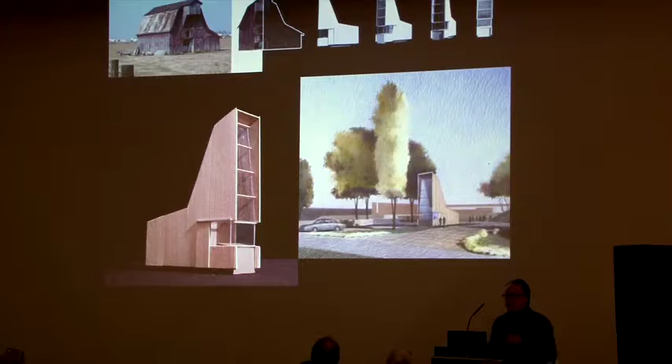Working between the ideal and the improvised in our culture, the condition of resonance is operative here. So we try to find ways to represent what's already there, operations that allow us to take something relatively similar and take a more transgressive attitude to reframe it, to repurpose it in a sense, and to reoccupy it in a new and different way.

When I was growing up, my desire before I became an architect was to be a cartoonist. Except I finally came to the conclusion, after reading an article that said most cartoonists are alcoholics, that I couldn't be a cartoonist. I was like, oh, I don't want to deal with that. So I'll become an architect. Well, anyways, lots of issues there too.

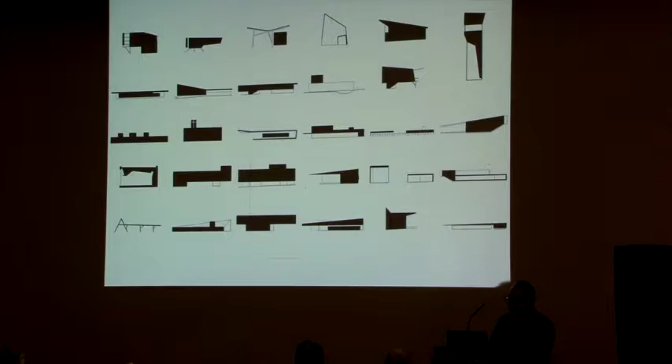But nonetheless, we approach everything, or at least I do, sectionally and as a visage and in profile, trying for the most reductive means of expression. So we've got a whole taxonomy, a whole collection of projects in the office that we've done, with tons more, but always that's how we understand it, as a kind of singularity in its place, first and foremost.

So that's allowed us to engage typologically with different things. The Tower House, for example, everybody gets a project like this, I know. But working from our own place here, from our travels, places like Lucca, a trip to Yemen that I took where people live in towers, but their great social space is the mafraj at the very top.

We're in the city limits of Fayetteville, looking at what nature provides as this thing hits the ground, the textures and patterns. We're intrigued with the striated bark of the white oak, which we milled about 20 miles away. It's a renewable resource that becomes a white oak lattice fin around the 50-foot high stairway, which also marks the mature datum of our oak trees here. They don't get very big where I'm at because our cash crop is rocks.

But once you get up above the canopy, there's a whole other order in the landscape of industrial and agricultural buildings, almost all detailed in white panels and white metal—a whole other order. So we came up with our own white metal panel system that slips over the wood like a husk and creates its own kind of grammar or syntax in its place, all trying to respond and operate in dialogue.

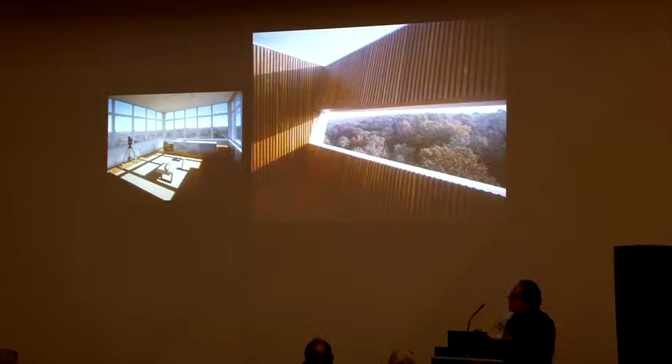And then when you get to the top, it really becomes an active view and how one views the view beyond—a room with a 360-degree view, and then a stair folds out. You go into a room with controlled views to the landscape, but open to the sky, a sky court in which you can take a dinner or sleep out under the stars. It's quite fantastic to engage the world both horizontally and vertically.

Another small project, this was for a girlfriend's, an ex-girlfriend's mother. One thing I tell students: if you ever get dumped and the other person asks you to be friends, at least consider the possibilities. I didn't get to do my mother's house, but I did get to do my ex-girlfriend's mother's house.

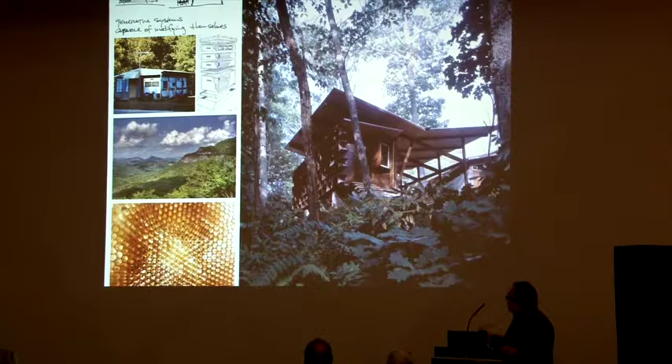Ten years later, she came back as a beekeeper and said, I need a place to take the honey from the honeycomb and turn it into jars of honey to sell along the street. So we made this little structure, 8 foot by 24 foot—it's a honey house—focused on one element, a steel plate and faceted glass wall that's load-bearing. It's really a wall made of voids that acts to organize and display. It also acts as a brise-soleil, creating conditions of opacity, transparency, and translucency in the faceting as it fuses with the landscape around.

A project we had the opportunity to scale up and deal with another typology, that of the recreational building, the golf clubhouse. We were approached by Mr. Tyson of Tyson Foods, who wanted a private clubhouse, but he said, I don't want another Tara or plantation-looking thing or a hunting lodge, which most of these look like.

He said, I want a building of the 21st century that's part of its place, but also respects the traditions and rituals of the game. So we have great stone here, locally quarried, dry stacked, and we wrap the building, this tube, in copper, a 1,000-year material that will turn into a leathery brown over time. It's a repackaging of this traditional program, but adding some surprises as well, like the skylit bath in the wet area.

When this was published on ArchDaily, somebody blogged, hey, Zumthor called and would like his baths back. And I was like, oh God, I must have been channeling that. About 3 hours later, somebody blogged and said, hey, the Romans called Peter, and they would like their baths back. So it's all part of a lineage here.

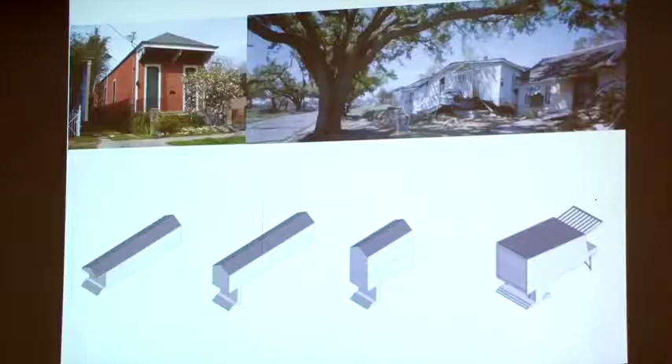But anyways, it was a great opportunity. It wasn't about golf, as I was informed by the owner. It was about people and space. And that's something I think as designers we should be able to engage. The idea of typologies for us, which is architecture in some ways freed from style, is that it is adaptive, dynamic, evolutionary.

This is a post-Katrina house in Biloxi, Mississippi. The group of folks got together - Oprah Winfrey's Angel Network and Autodesk, what a great combination - for 7 model homes to address the new FEMA regulations and to challenge the new urbanist proposition for the Mississippi Gulf Coast. Folks decided not everybody wants to live in grandmother's house with a geranium on the porch, but in fact really deal seriously with having to lift houses now above the storm surge, anywhere from 6 to 12 feet.

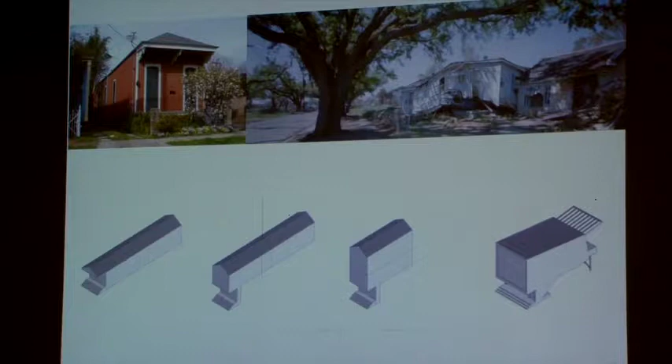So this house starts with the typology of the shotgun, and then we have to lift it. But the thing we're ever mindful of as Southerners is that the porch is that interface between the private world of the house and the public world of the street, and was very important to the social and urban fabric to remain where it typologically always has. But then we stack the program to make it more adaptable to various sites and more concise in its footprint, and that became what we call the porch dog.

And this is it. This is a market rate house, a prototype that can be repeated. It's a $130 a square foot house. Quite excited about that and the possibilities it holds for the future.

Of course, this is what the New Urbanists came up with. It's called the Katrina Cottage. And I can tell you which one won't be there after the next category 4 storm surge. So these things are real, they have consequences. Again, if typologies are only seen as fixed, they just become a discussion about style, and I think this is really what this suffers from.

So I'm going to show you 3 projects that deal primarily with landscapes, and then I want to show you some projects that deal with maybe why you really asked me to be here, but Pamela assured me that if I could talk about landscapes in a heritage sort of way, that might be relevant as well.

This is a project in Indianapolis, the Indianapolis Museum's 100-acre art and nature park that we did with Ed Blake, a great landscape architect, a good friend who's unfortunately passed away, and Mary Miss, environmental artist from New York. Worked for several years on this. It's located in the oxbow of the White River that runs through downtown Indianapolis, and the canal, also a remnant, runs through, so it's effectively a peninsula island.

It used to be a pristine forest, became a pasture, and then became a quarry back in the 50s, dug out to get limestone to build the interstate through Indianapolis. Then it filled up with water and became an amenity in the middle of the town.

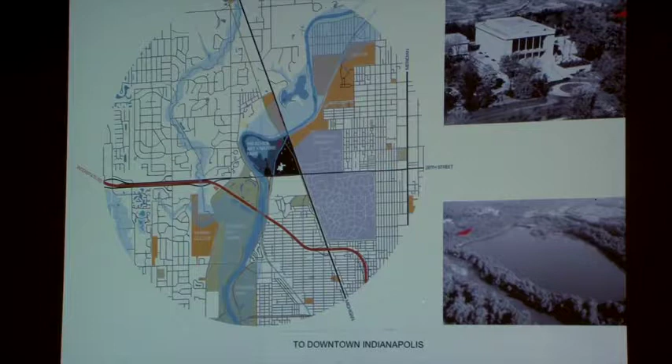We were asked to kind of deal with the volatile condition between land and water. Because of indiscriminate development upriver, they've had 3 100-year floods in the last 8 years. As water rises, the river rises above the lake and breaches into it, scouring the landscape. Effectively 100 acres became a floodway, flood zone, and wetland - there's only 0.67 acres you can actually build on in this property. Site-specific art, that's different, but actual buildings is another matter.

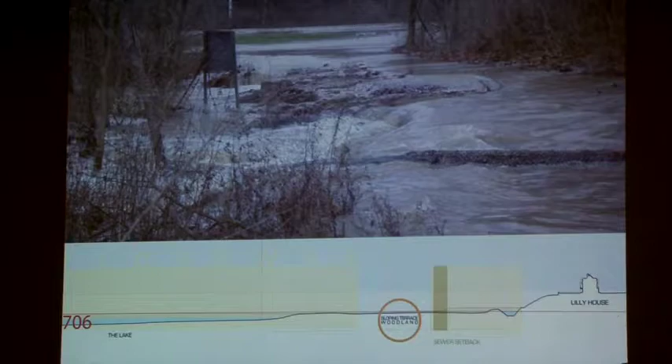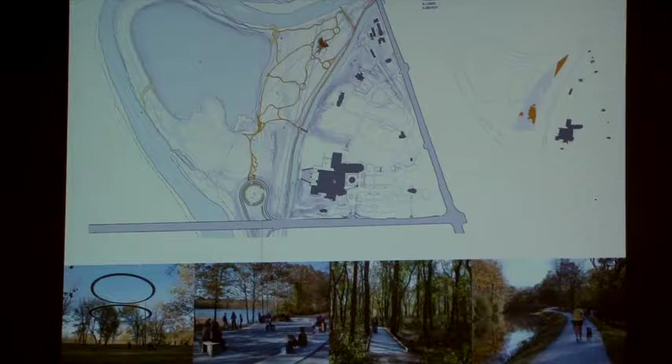So it wasn't too difficult to find our site for this visitor center in the middle of the park. It's part of a series of pathway journeys that Ed designed, not a destination itself, but an extension of these pathways. These are some of the different aspects of the park here.

For us, we came to a wet, fecund site that also fills with water, and we were challenged to elevate our building 5 feet above the forest floor because of the floodplain, which was really not something you want to do so much. But working with Ed, who'd been looking at our sketches, he came up with this brilliant idea.

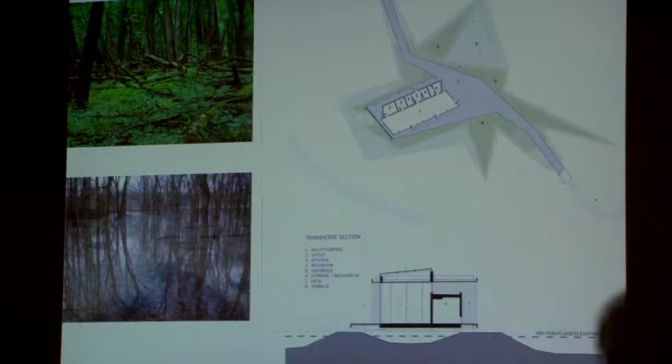Of a series of figured mounds that would point to places in through the trees to views, and the water could rise, and then the water could flow underneath, and this would just float above these mounds like an apparition in the woods. So it's a very quiet building, a simple exoskeleton with a material surface that operates for the deck, the wall, and the canopy, with the program sandwiched in between, kind of like a taco in a way.

And we looked at, again, what we're given in the place—the butterfly wings we looked at under a microscope, leaves eaten away by insects that revealed a structure to the leaf but a porosity to the surface. And it raised the question: could we develop a porosity in a structure that would allow air or water to move through it?

So this very simple structure is quite transparent and porous, allowing the air, water, and light to move through. We pleated the system so we could create intensities of light or rain or snow that come through. And the structure, brilliantly designed by Guy Nordenson, a great structural engineer, you don't really see—you only see it through its shadow, which is in constant movement because of the way the sun moves, and it intensifies that condition. So this building pulsates with the rhythms of the day and the season.

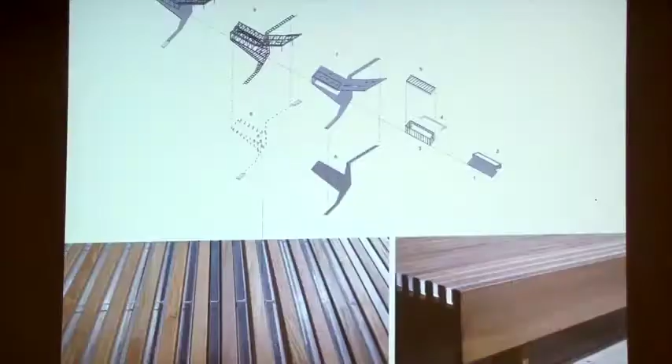And in order to get it past the codes, we had to infill the deck with these acrylic bars, UV-rated acrylic bars, so you can walk on it.

But when we light it up at night, it becomes its own kind of, say, ghost-like figure in the woods. Very simple, charred cedar for the black service box with restrooms and kitchen and so forth, and then a glass vitrine for the lounge to kind of take assessment of the experience of the art park and just relax and enjoy the light and getting out of the sun.

Water-popped, ebonized white oak, very polished, but then we allow the wood that wraps it to turn silver. So there's this condition—temporal conditions of impermanence and permanence together. And then this is all silver now, with the abstract black box that sits in the landscape.

So with this in mind, we recently completed a building with another really great landscape architect, Jim Corner, and his office, Field Operations, in Memphis. It's about 5 hours from where I live. It's a great opportunity—it's the largest urban park in America, a 4,500-acre urban park.

And what you're looking at here is the crossing from Arkansas to Memphis, the river. Memphis is, to me, the southern city with the most soul. It's the birthplace of rock and roll, Beale Street, the blues, the food. I mean, it's just great.

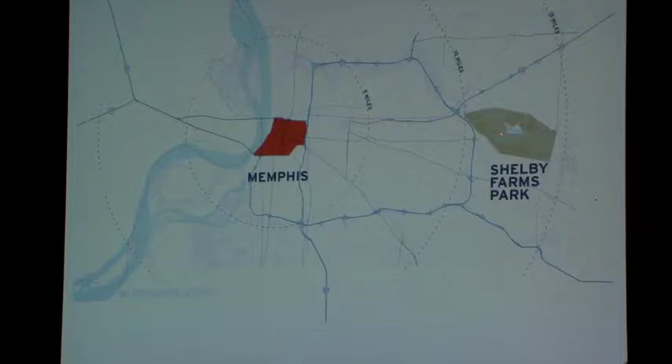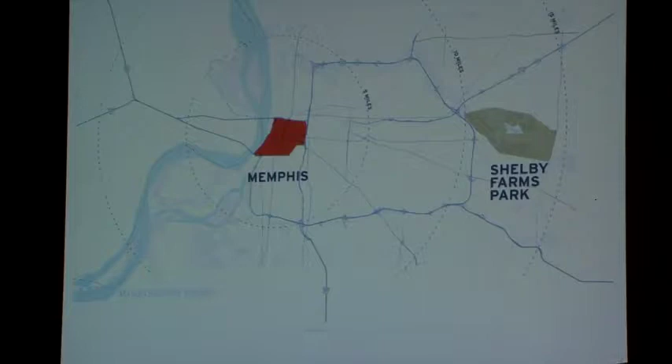JCFO had worked the whole park doing different vignettes, but the real focus was in the heart of the park, this lake in the center that really didn't have any identity. They needed things to generate revenue like a visitor center, restaurant, retreat center, boat kiosk, stage pavilions, things that could really activate the center and create revenue streams to help support the park, because they get very little public money.

So this small lake was expanded to an 80-acre lake, and we were charged with doing about 7 buildings. We saw this as an opportunity to do an ensemble of buildings that shared a similar language.

One of the things we noticed being in the park is that wherever there was shade, there were people. No shade, no people. A picnic table in shade would be filled with people. 20 feet away, sitting in the sun, nobody. So we were wondering, what if we could make buildings that create their own shade, through the language of the porch. Each one becomes part of a kind of porch grammar in this ensemble.

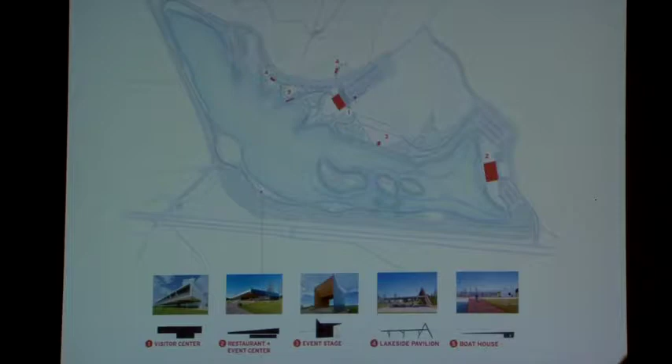So this is the landscape we're dealing with, the lake, and the first building is the visitor center. They also have buffalo here, so that's not something you associate with Memphis, but they have lots of buffalo.

So we went back to origins, looking at typologies, the small structures that occupied this agricultural landscape, the sharecropper's cabin with its porch, the large agricultural sheds, as a place to start this language we wanted to develop. Our first building, the Visitor Center, is an 8,000 square foot building with an 8,000 square foot porch faced to the south.

The purpose of that is to allow it to be programmed year-round and activated, because when you're in the sun in Memphis, it's not cool. But even when you're in the shade in Memphis, it's not cool either. It's because there's no breeze half the time. So you're just sweating like a pig in the shade. We had to do something about that.

As you can see, there are 5 20-foot, what we call big-ass fans. That's the trademark for them. They ventilate the shade, creating an analog with how nature works in the forest. It's that the porosity of the canopy of the trees keeps it cool, the ventilation.

So we also created breezeways, dog trots here, second growth cypress we can get. This is all aluminum bar grates, used in the agricultural industry quite a bit.

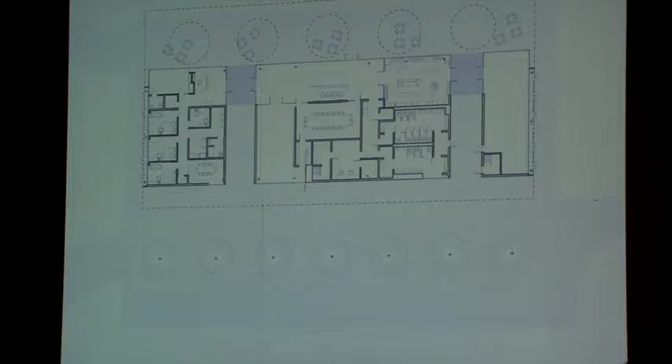Wonderful bosque that's really quite large, that JCFO did. You move through that bosque from the parking in through these breezeways onto this porch with this unmitigated great panoramic view of the lake and landscape beyond.

So here we go, moving through, boom, boom, underneath the porch. And then all the program is along that edge with this nice indoor-outdoor feel. One of the unlucky buffalo becomes the mascot there.

And it's a very transparent building. The idea is to make something tough and not precious, although highly crafted and precise.

Looking back here, and really how the landscape and everything will come together, these trees will grow in quite lovely over the years. And then we light it up from inside. We got a great lighting designer, Richard Renfro from New York, and a University of Arkansas grad, I might add. But it's all orchestrated with lights on the inside, so it becomes a lantern at night in the middle of the park, so the park's hours can be extended even further.

I show this to you, this is after an event, but the event was 5 o'clock at night in June. It was 95 degrees, had just rained, 95% humidity, and there was a big party that went on here and nobody's sweating. Everything, the fan and everything, is cooling everybody. So again, it's very performative as well.

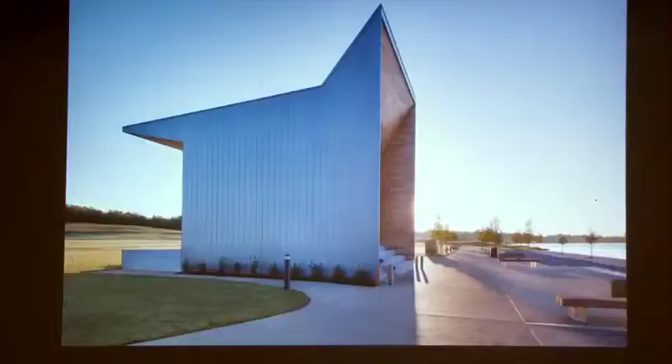So, a stage pavilion that also acts as a shade pavilion when it's not being used, and can be used from both sides, from the lake and from the amphitheater side.

A boat kiosk here, where all the kayaks and concessions are for the park, creates its own shade. You pull the boats out underneath there, then before you transition to the water. Picnic pavilions, creating their own shade.

We call these the crickets. They're all over the place. And then I have a render because I don't have a good shot.

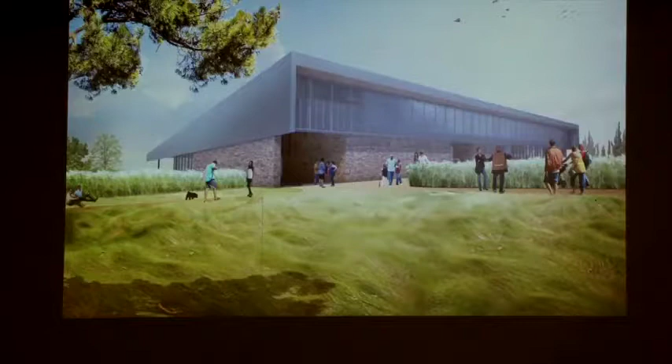We haven't really professionally shot this yet, but the restaurant retreat center with a new farm-to-table restaurant with Kimbal Musk has put in, along with a multi-purpose event center. The thing that makes it unique is this huge porch, 80 feet deep. It's actually more people outside than inside, and it's a 3 month reservation right now trying to get the evening slot to see the sunset as this faces west.

So people really like being out here. This works really hard to cut down the sun and the glare as the sun sets, and it's quite magical as you see the transition from day to night here, and then the silhouettes of the figures that sort of articulate this landscape.

So very excited about that, but I want to shift gears now to another landscape that is probably not as particular to where we're at here, but where I live, we're primarily agricultural. We're a 60% forested state with lots of farms and so forth. So many of the farms and rural landscapes are being annexed and turned into suburban developments, gated communities, gated office park stuff.

We're not ideal. It's all messy. We deal with that. But this is the landscape of a place not far, Rogers, Arkansas, not more than about 15 years ago. And today it's become the land of beige, if you know what I mean.

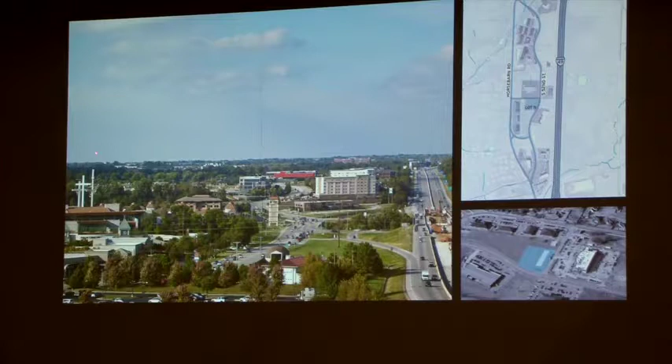Beautiful land of beige. In fact, the only thing really iconic in the landscape are these guys here, you know, but we have a different kind of power, I think, here.

So the parking lot becomes the plaza, in effect. You can drive around and drop the patients off here underneath, then park, which is a very dignified sort of thing to do. And it also recognizes that you're driving by at 40 miles an hour - you may not be coming here.

So that has to activate our perceptions too, so that as we drive by, we discover that in fact there are 2 sides to this thing. And so it presents itself in a kind of more normal condition along the north side, provides views with the north light. Whoops, see if I can do that again.

Here we go. And so you have a porch for the staff entrance in the back, and then the public towards the front here. So people are dropped off, they go in here, in this nice little lobby.

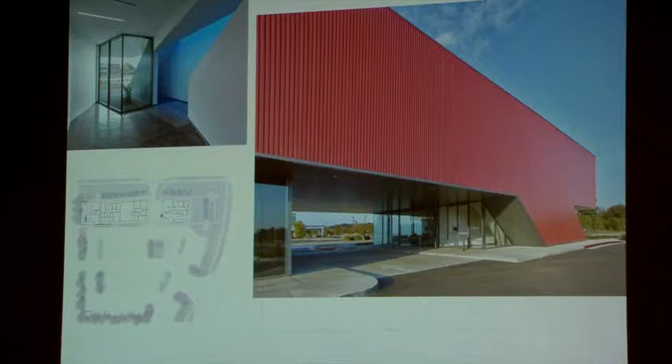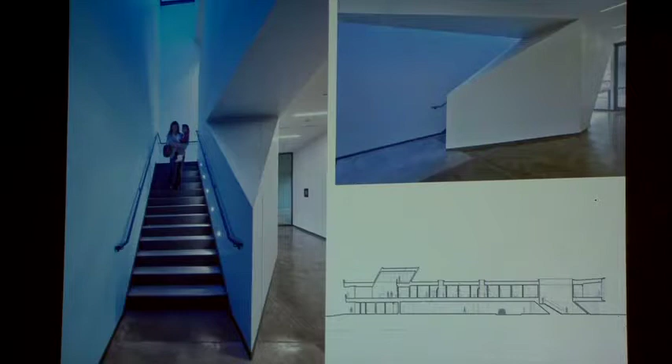So we thought it would be important if kids are not feeling well, they come in, they have this sort of iconic gesture that they can identify with. They come in, and we wash the entire stairway that they ascend to in blue light. We're using blue glass and just create a kind of otherworldly condition. It's not paint, it's just light washing its way down, just to kind of decompress them a little bit as they come up.

And then just a nice reception area, just a free plan. You can circulate around, so you can actually start over here and see the doctor and move back around through, check out, and go right back down. So very simple circulation, nice place, nice views to the suburban landscape here.

All are beautiful. Maybe if we reframe it, we'll see. But very nice, humane spaces for the kids that are all skylit, warm. Nurses that work there, the nurses station, doctors have skylights from above too, so in the middle of the building where normally it would be dark is washed in light.

And for the doctors who are on call, we have a loft up here, lounges where they can sit back, relax before they go into surgery and so forth. So in many ways, a very humanist approach, but at the same time, something that's critical of its context and where it's at. This is the staff entrance here at night.

So, the word sustainability is used and thrown around all the time. I think we've gotten past the greenwashing of our professions a bit to where it's really become part of what we do. Even clients ask for it. That's amazing, because 10 years ago, you couldn't even get a client to ask for it. But what I've come to the conclusion of after doing this for 10 years is it's less about the bells and whistles, the big gutter or the big cistern so I can demonstrate that water falls in it. I think it's really about what we already have and how we use what we already have.

And so I show these photos to you from the 40s, 50s. These are Getty images of J. William Fulbright's mill. His family owned a mill. I'm sure you've heard of Senator Fulbright, who was from Fayetteville, Arkansas. And they made farm implements, plowshares, axe handles, wagon wheels, and so forth. And post-war, there was less and less demand for this.

And right about the same time, there was another fellow, an architect from Fayetteville, who was doing the first fine arts complex in the country on the University of Arkansas's campus. His name was Edward Durell Stone. And Mr. Fulbright approached Mr. Stone and said, I've got all of these implements and I really don't know what we can do with them. Nobody seems to want to buy them. And Mr. Stone said, I've got an idea.

What if we turn them into an international line of furniture? We could use it to populate my new complex and then we could sell it. And he said, a brilliant idea. So here, plowshares become chairs, wagon wheels become stools. We take the great craft of basket weaving in the Ozarks, strip the white oak to its bark, and make chaise loungers with big, giant plowshare handles, and then modify them with the legs.

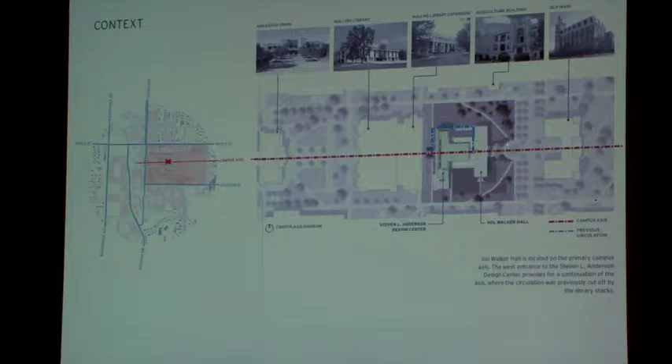The problem was because the center of the building, it was a library, it was filled with reference areas for books, so you always had to go around. And the school community, the university community, could never come through our building like they could the others. So we wanted to correct that.

So we decided to core out the original building and reprogram it, bring back a lot of the existing detailing, the historic detailing, as well, and then do the addition of the new. So the T transforms to an I or an H. And you can see some of these construction photos where we're literally coring this out just to get the crane in there to begin to rework the building.

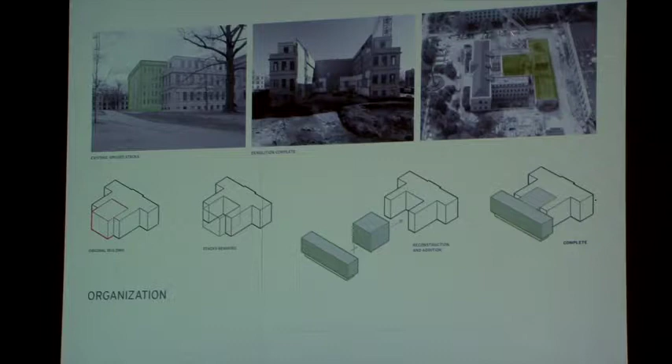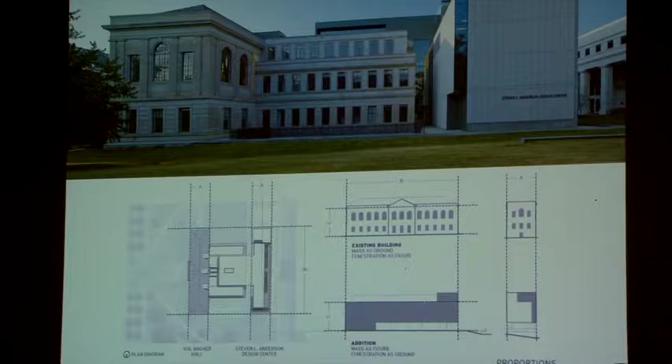We approached it as a kind of inversion of the existing building in this figure ground, where the mass of the building is the ground and the figure is the ornamentation and the windows. The inversion of that is through new technologies, new ways of thinking about space. The building becomes the figure and the window is the ground. It's a great way to compare and contrast about how we build these days and how we operate.

We had a west elevation with terrible sun there, so it's all controlled through custom brise-soleil, glass fritted fins and steel curtain wall that's all locally made about 10 miles away.

And so the whole new axis now, people can move back and forth through the building, and we reconnect ourselves with the university.

200-year-old oak trees came down. We wanted to keep those trees, so we lumbered them in South Arkansas, took it to Mississippi, had it transformed into a tableau that starts at the base of the tree, goes all the way to the top, and now we can talk about face grain, end grain, long grain with our students.

But it's right on the axis, the big social space for our school. We've had Shakespearean actors up here. It acts as a stage, a mariachi band. It does exhibits, all kinds of things, and it's all part of these vitrines and everything. So it becomes an activated element in the middle of our school, just repurposing.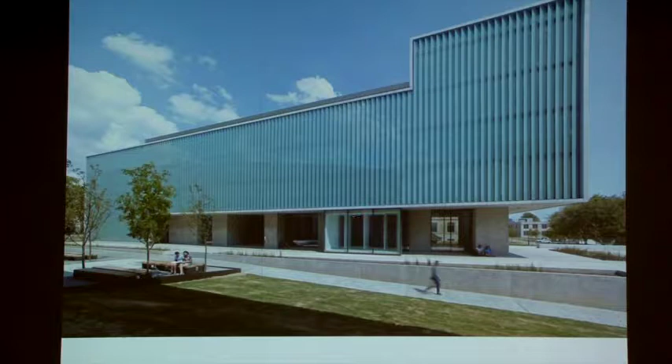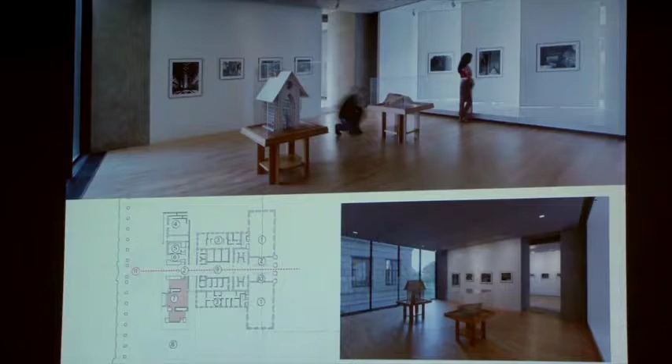And we have an exhibition hall, and you can see through to the old, but now this exhibition hall can be secured. We can interface with the larger community, the university. Our first show, of course, is a retrospective on Fay Jones, with movable walls to control the sun. Again, the old and new connection.

And then we light it up at night, and it's a lantern in the middle of the campus as well. No longer is this an architecture school that is encapsulated like an asylum, with lights on at night and people wondering what in the hell goes on. They're on 24/7 over there, but nobody can access it. In this case, we're happy to be the fishbowl, see what's going on.

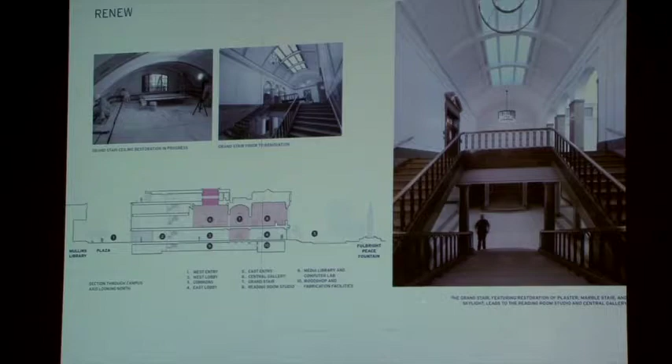But all of this is restored and lit, with new lanterns and such, all the original stair, marble, and brass. The old reading room is transformed into a studio with new lighting, custom desks with lighting built in, all new mechanical systems that really clean up so that you can see the detailing.

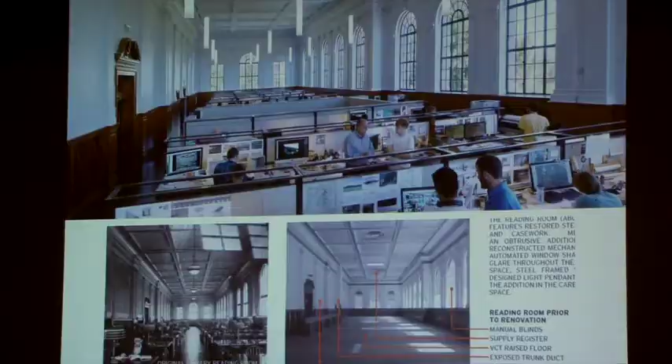It looked like a scene from Brazil for so long, with ducts hanging everywhere, so this was really a great opportunity to showcase the new. And then our central space, the reference area, our largest space where all the reviews take place and great events, was always poorly lit and had poor acoustics.

And we needed space, so we took the roof of it off and put studios up there, and then took a 2,500 square foot fabric ceiling and backlit it, so we have even lighting, and it's perforated, so it solves the acoustics as well. And so this becomes a really very useful space for reviews and events.

We can actually take these panels now and roll them out and store them. We never could do that before.

And then we carved a hole right in the middle, an 8-foot by 20-foot piece of glass with a window to the sky, to nature, right in the middle of the school. I tell students to go up there and look in the vitrine. It's better than another Red Bull after they've been up about 3 nights. Stay in there, get charged up, get back to work.

But very simple. And then all of this is new, so it's all been exactly matched to the old here, original, with plaster and everything to match the original. We use actual plaster. And then we carve a slot through, the one big move to connect the old to the new so that they all come together.

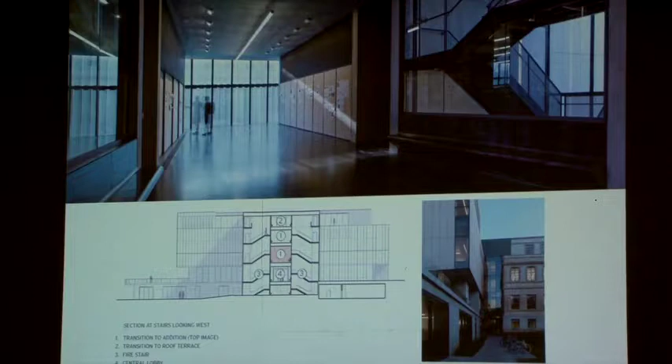And that joint between is actually the new egress stairs, all framed in glass. The new studios, really tough, cast-in-place architectural concrete. And you can see the light of how that's mitigated through the brise-soleil and balanced with artificial lighting as well.

And a series of classrooms, our large classroom, the auditorium, and then it's a split screen system, so we can get a faculty lounge here where we go and gossip about students. Big learning classroom.

And then underneath, the students get their own lounge wrapped in felt. And we call it the boneless chicken ranch. Kids, beanbag chairs, they go and they hang out. It's dark. You're not supposed to work. It's just a chill pad. And we have showers right next door, so you can shower too.

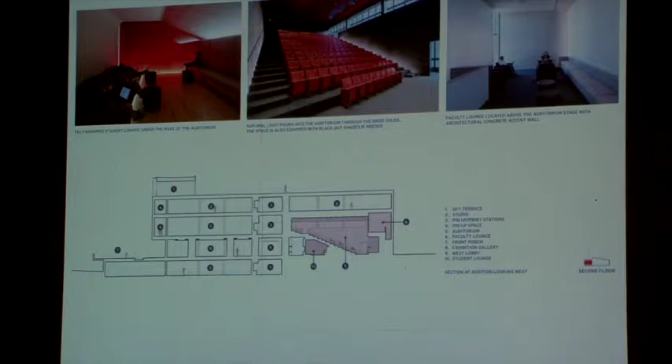Problem with that is we had several students living rent-free for a couple of months in the first semester when it opened, so we had to solve that. But lots of natural light, but you can close that up too for events.

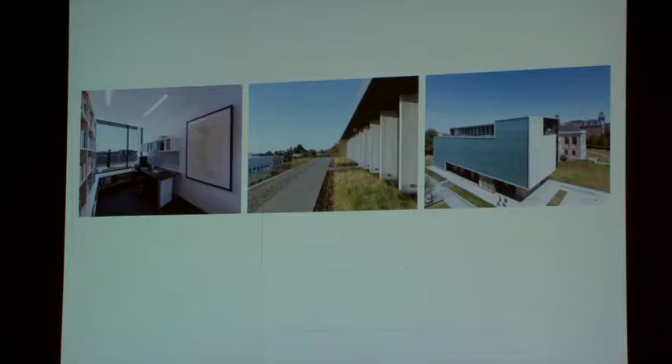And up top on the roof, monastic-like faculty offices, 7 by 16 feet, green roofs, Ozark sedum roof, and then an outdoor classroom here that's covered, a place of prospect and refuge. With movie nights here. This is where the students take their lunch during the day.

It's a great place. So social spaces, learning spaces, all part of this that make it a unified whole, which in effect is what it's made our school now, is a unified whole. And you see the lineage here of the old, the first generation, the second generation, and now the third generation together.

So we had an opportunity to take another library, which was a library from the 60s called the Fulbright Library. The library had moved, it had outgrown this building, and moved to another side of downtown, and they were going to tear this building down. It was in the historic district of Fayetteville, and so the folks who lived in all the Victorian homes came out to protect this building because they saw its value.

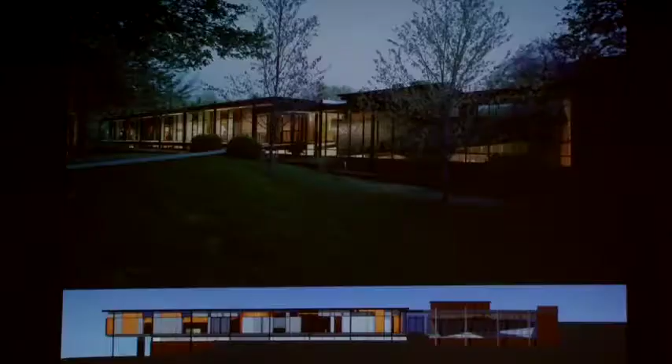And we were asked to come in and help renovate it, transform it into a 30,000 square foot office building. So we completely opened it up, kept the bones. The bones were good. I mean, when you get a project like this, the first thing that runs through your mind is, wow, all I can do is screw it up. Because it's a good building already. But we transformed it as delicately as we could.

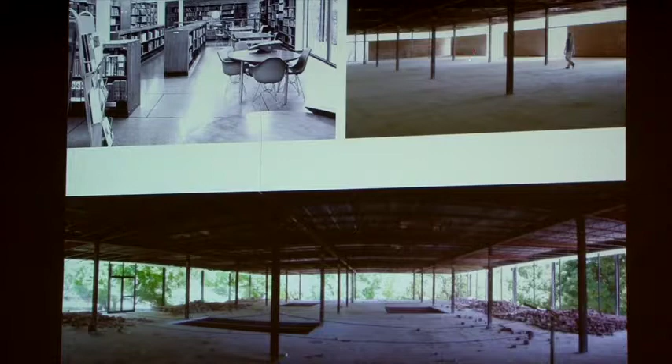It's a mat building, so how to get light into it. So these walls were leaning in and falling down. They were not connected with rebar or anything. They were just laid on the top, so it was really doing this.

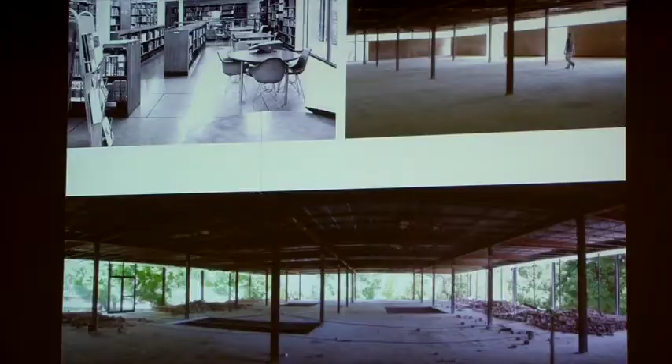So we removed those so we could get more light for the offices, and then we cored out a series of courtyards and also in the roof to bring light into the middle, so you could rent the downstairs the same as the upstairs. And these are quite nice without moving any of the actual bones or existing structure.

We just carved away at the slab here, and then set up our own kind of language independent of the universal grid of columns that exists in the kind of mid-century modern idiom there.

And then we added 2,500 square feet to the end in the same language here, and then to connote that relationship between the old and the new, or so you could tell them apart a little bit, we create a joint between with the stair that connects with the parking lot and brings you up into this brokerage firm that's up on the second floor.

And in the conference room, we had to deal with the acoustics, so we decided to make a kind of public artwork, something we could give back to the neighborhood. We call this the acoustic shroud. All black zinc, all acoustic performance, with bending and angles for the acoustics, in a very nice room. This is also used by the public in the community as a community space, and they can lease that for free. It makes a nice shadowy figure on the street at night, right in the neighborhood.

So I'm keeping moving fast because I know Pamela wants to do some Q&A.

So we're given yet another building, this one not so good. We're in an area that used to be farmland, and it all becomes a commercial office park. A woman, Victoria Butler, who wanted to enhance her Montessori campus, had us build this building here a few years back along with her elementary school. Now she wanted to expand these buildings, the horrible buildings, across the street to unite her campus. Of course, we had to go across this creek with a very different building, but a primary building. This was a strip mall here, and we had to keep the strip mall. We had to build this in 5 months, design and build, for $112 a square foot.

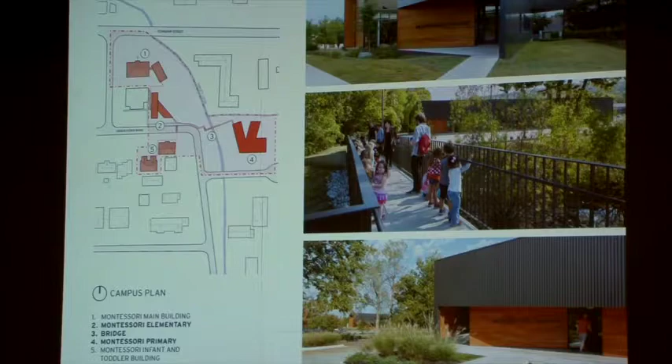So what to do? We had already established a palette of second growth cypress and box rib metal panels. The bridge connects - this was what we found here.

A beautiful adventure in architecture: we discovered that these columns didn't hold up anything. They were hollow, just there for effect. So we said, let's get rid of that, and work on this piece here to make it a sun visor and a way to delimit the liminal zone between the parking lot and all the classrooms.

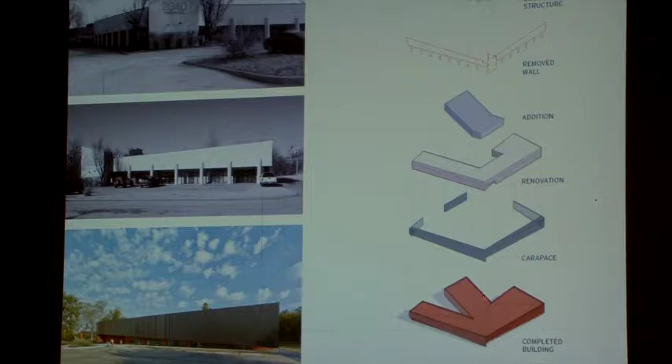We used the exact same openings that they already had here, but we then introduced an addition to create a series of controlled play areas for the students.

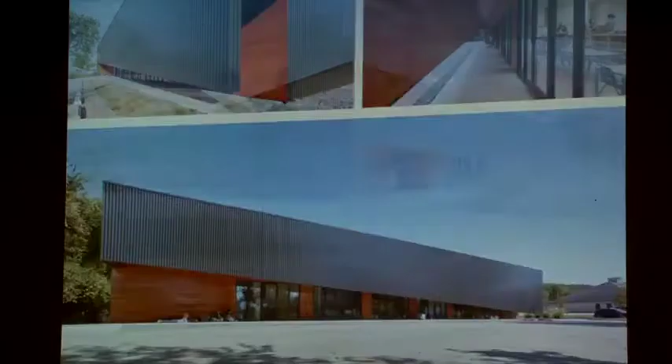So very simple, same palette of materials, just a simple figure out of a strip mall. And it also works with the sun - as the sun moves around, it creates the shade that's needed.

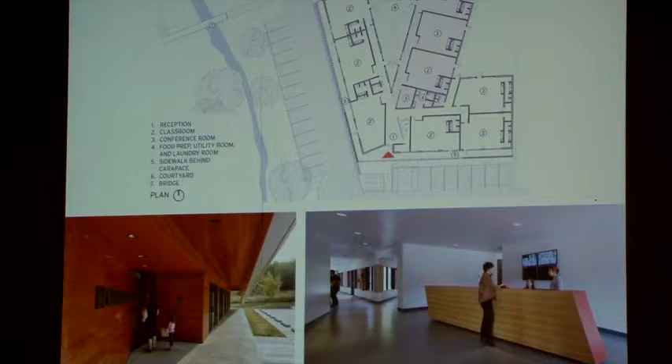And then as you come in, it's very inexpensive, like I said. We splurged on some wood and some laminate here for a desk. But the V here comes together, becomes an important moment where the students' display of their work is here in the hallways - it wraps around. And then there's the simple courtyard where the students hang out and play. There are several different courtyards there.

Anyway, making something out of nothing right there. So what was a liability in this neighborhood now becomes an asset and an amenity, and all for $112 a square foot.

In that spirit, we were approached by a library board in a town, Gentry, Arkansas, a town of 2,500, a relatively poor town. They had one industry in town, a Little Debbie snack food plant, along with a wild country safari zoo, where you drive through the landscape and emus and monkeys chase you while you throw Wonder Bread out the window. That's it, that's what they had.

But they had a dream of having their library, which was a public library that was privately funded, to be on Main Street, to reactivate Main Street, which as you can see had fallen into some sort of disrepair. They had bought a building from one of the local families for $1, an old 100-year-old hardware store.

This is it, this is how we found it. It's in Tornado Alley in this part of Arkansas, so it had been hit by storms - a brick parapet blown off, a lot of the brick detailing blown, all the windows blown out and boarded up. This is it. And they said, hey, we need you to turn this into a library.

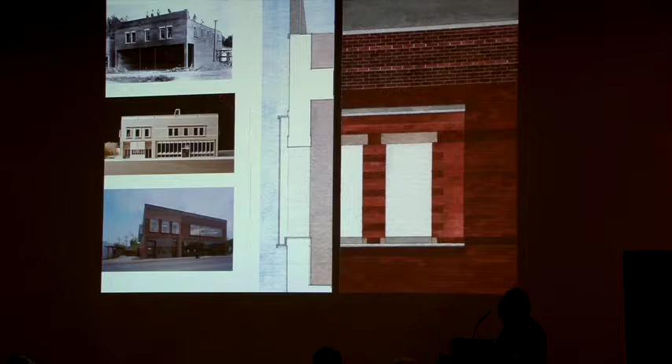We even made up a steel parapet that replaced the one that had been blown off years ago. This is when it was being built. And so this becomes a new vocabulary that gives us this new identity.

And we had to do it for $108 a square foot. Today, it's still the least expensive public library in the state of Arkansas. Very difficult, it took 7 years to build, had to be rebid 3 times. It was very difficult, they had very little money. But this little town raised their own millage and then got a donation from the Little Debbie snack food family. And we were able to build this for $1.1 million, over 10,000 square feet.

And it's a tough town. This is the mayor right here, and he owns a tattoo parlor. But he's the best, I wish he would have run for president. He's the best politician I know. And he got us through 7 years of hell with the local city council.

But we got this built, and just, again, very simple: the reading stacks down below, up above the genealogy department, the community room here. This is where all the clubs in the town happen.

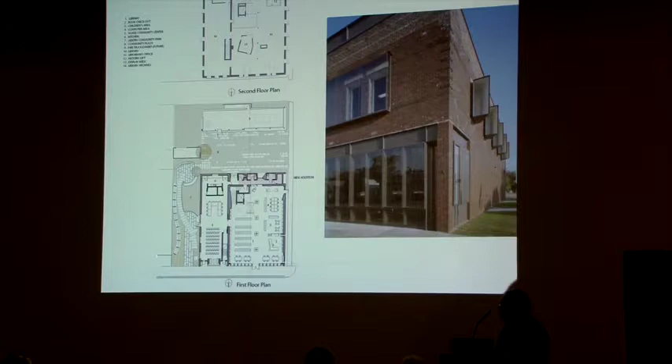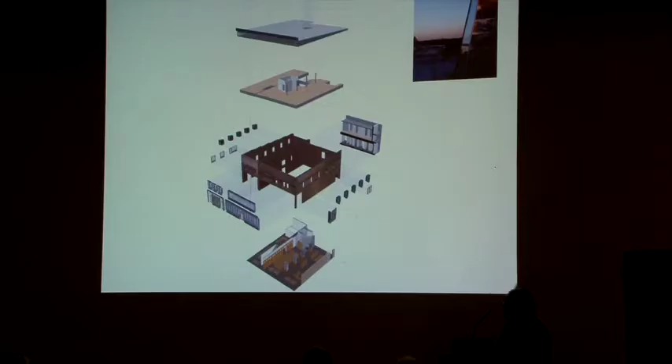And then the Little Debbie's Snack Food Pocket Park right here, plaza in the back, future home of a place to showcase their antique fire truck. And it's the brick chassis here, and then the kit of parts that we designed that all come together, even a beacon on top of the old skylight here to mark the center of town. And again, it's a beacon in the middle of town, a seed project for the rebirth of Main Street here.

We use structural sealant with big pieces of glass, and then we build wood frames to hold them in place, let it cure for 28 days, pull it away, and it's just a beautiful soap bubble, transparent interface between the street and the reading areas.

And the pressed-tin ceiling could not be messed with. That was absolute, no lights, no HVAC. So the mayor got county prisoners to come over and take each tile down, and then they restored it off-site and brought it back. And so all the HVAC is from the side here.

And then to get light, we had to replace the column, so I always wanted to bring Mies into a project. So there's Mies, wrap it in glass, wrap it in books, put the light here, bounce it off the ceiling, and you get your lighting for the reading area.

And the old lift becomes an exhibit for the old buggies that used to be sold upstairs and brought down, hooked up to horses. Place for the librarian who wanted to be away from the people. She says, I don't like people, I like books. So we have her own little haunt there.

And just opportunities to take in existing openings and bend the north light around into the space and create an opportunity for the intersection of something that could be considered almost spiritual with the prosaic. And this is a project we're very excited about. It's won the National AIA Library Award.

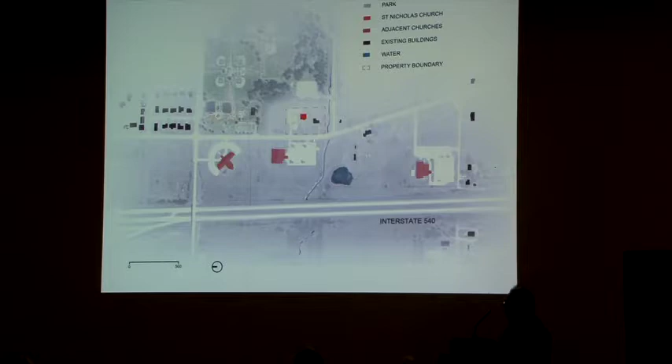They bought some property right along the interstate, at City Park, and there were some structures that came with it. These are all the mega churches around them. So they wanted to be seen from the highway and kind of take on the other churches in terms of presence. They had $100 a square foot for the building, and they said, could you build this for us?

We were like, well, yeah, if we made it out of cardboard or something, I don't know. And I said, we certainly don't want to go down this road—these are adventures in religious architecture where I live, let's hang a cross on a metal building. I mean, nobody would live in one of these, and I don't understand why you'd want to worship in one either, but that's a whole other debate on values.

I grew up a Southern Baptist, I understand this world very well. But they said, no, we can't do that—however, this is what we have, and since we only have $100 a square foot, could you turn this into our sanctuary and fellowship hall? And I said, you mean like tear it down and build? And they're like, no, this is it. So our hearts just dropped into our stomachs. It was like, wow, we finally get a church, and this is it.

So we went back to origins. We went back to the Greeks. We thought about the whole Orthodox Church and the Greek tradition, and we thought, what is it that we as architects can do that doesn't cost anything? It's scale and proportion—that doesn't cost anything, and we're supposed to be the experts in that. So we looked at scale and proportioning systems from the Greeks and decided we're just going to reproportion this thing based in the roots of their own religion. And that's what we did.

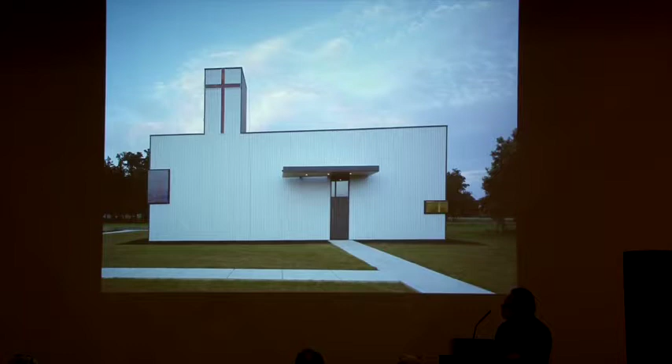And this is what we came up with, all working through the golden mean with a little bit of Corbusier, because that goes well with everything, I think. This singular figure embodies many things for them—the colors in the glass, the icons, and again, the symbolism.

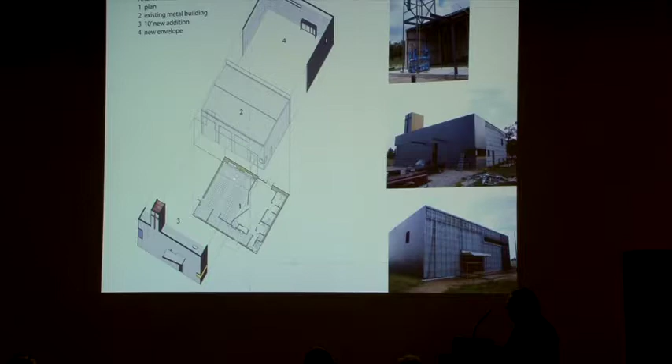We were able to do that by just keeping the building intact—we actually put studs around it and rewrapped it with a new box rib metal skin. We added 10 feet to the front to create a narthex, running north-south, that we could then intersect with the axis running east-west, which was very important to the congregation. This is the fellowship hall with movable walls on wheels that allow for overflow during certain rituals and worship services during the year.

Everything is coursed out beautifully with this box rib off-the-shelf metal system. We customized the corner transitional details to give it as flat and abstract a look as we can, trying to get as reductive in the figure as we can, not unlike a barn. It's coursed so well that this is actually the fire door—we had to put a little concrete pad there so you can see where it is. And that's it from the highway.

Most of our projects in Arkansas come with cows, you probably imagine. And we light it up at night so you can see it.

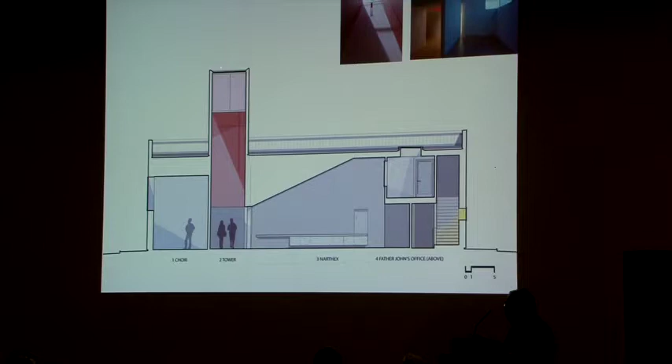Section through the narthex, Father John's office here, the niche for St. Nicholas, their patron saint. A return air duct, which is Arkansas white oak, has a steel channel filled with sand here where you take candles out, and come beneath the tower with the cross and the blood of Christ that you're washed in before you enter into the sanctuary. So here you go.

You come in, we cut one window on the east side into the existing building to get the morning light. Then the iconostasis is all angle iron, made very transparent. These are actual doors, so you can get back into the altar area. There's Father John in his regalia.

We gave them everything, but the one thing we couldn't give them was a dome, because the steel structure on top couldn't be cut through, so they allowed us to put one in the plenum. But they couldn't afford the big fiberglass dome we had spec'd, and the contractor said, I can't build a dome, it won't look very good, it might look like an ellipse or something.

So we were a bit flummoxed. We're in the middle of construction, but our contractor, ever creative, came up with an idea. He says, I know a friend of mine who's a metal worker 20 miles away who loves beer. So for two cases of beer, we can get a satellite dish, and that can become our dome. So that's exactly what we did.

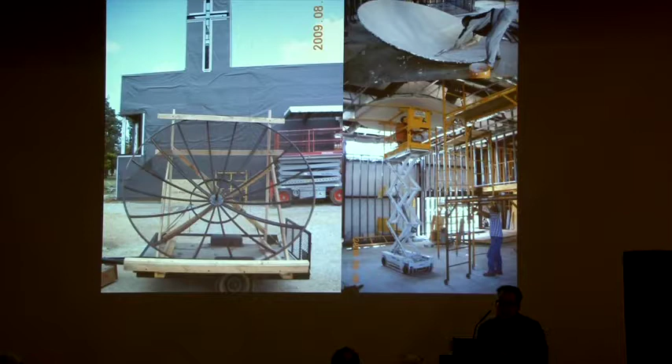We went and gave this guy some beer, he takes it apart for us, we put it on a truck, and we're literally under construction. Satellite dishes are their own lath, so you can plaster them right, you don't have to put lath on them. So we plastered it here, jacked it up on the scissor lift, and they have their dome. So that's how we roll in Arkansas.

One of the building committee's members was so excited about this, he said, I can get us a free bishop's chair too, it's walnut, crushed purple velvet upholstery, and I can get it for free. I said, really? Where are you getting it? He goes, well, it's part of an ad campaign at a local liquor store. He goes, I just don't know what we're going to do with the embroidered CR on it. I was like, what do you mean? He goes, Crown Royal. And Father John was listening in, and he came over, thought a minute, and says, no, Christ the Redeemer. Anyways, that's how we go.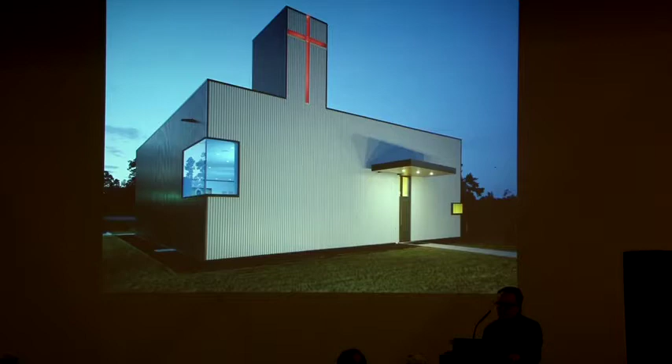In 2013, we were given a call by Elizabeth Henry, head of the National AIA Honor Awards Committee, to let us know that this had won a National AIA Honor Award. She said, we were struck by how inexpensive this was, $100 a square foot. So we did some research on our own, and we discovered this is the least expensive building to ever win a National AIA Honor Award. We were so pleased to hear this, because it underscored what we've been trying to do all along for the last 25 years in this part of the world, which is to demonstrate that architecture can happen anywhere, at any scale, at any budget, for anyone. Thank you.